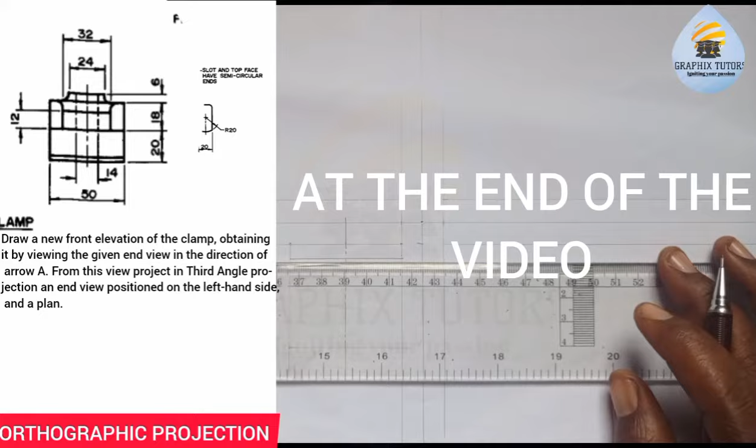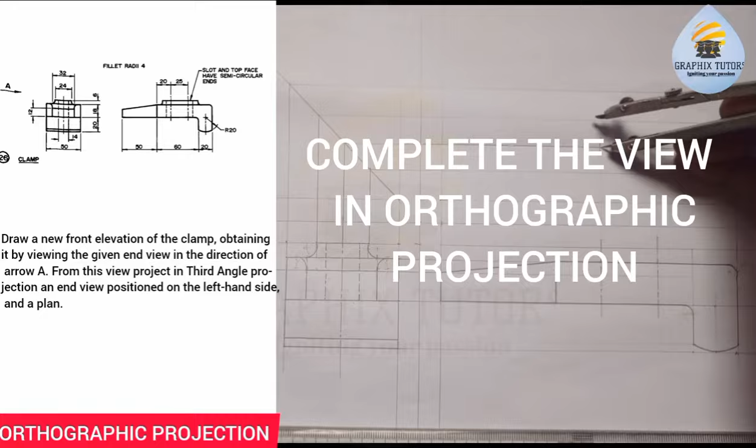If you look at the left hand side of the screen, you will see a figure, and the question that follows this figure says: draw a new front elevation of the clamp, obtaining it by viewing the given end view in the direction of arrow A. From this view, project in third angle projection an end view positioned on the left-hand side and a plan.

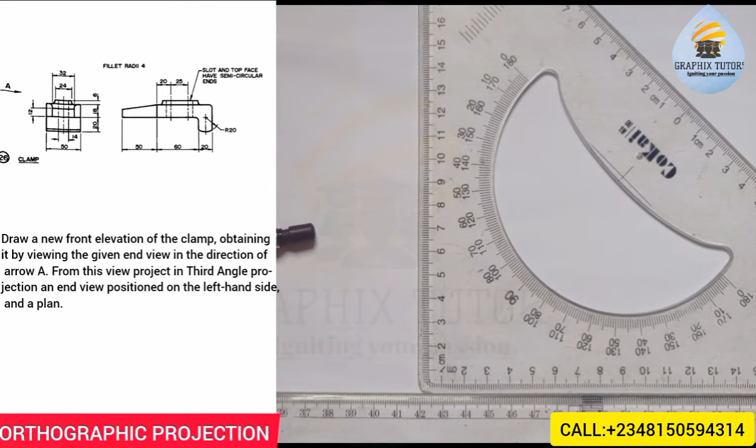Now, what we're about to draw is an orthographic projection, and the diagram you see at the left-hand side of the screen is incomplete, right? So we have to complete it, and we're told to redraw it in third angle projection. Is that okay now? So the first thing you have to do is to draw your vertical line in this fashion, and you draw the horizontal line in this fashion.

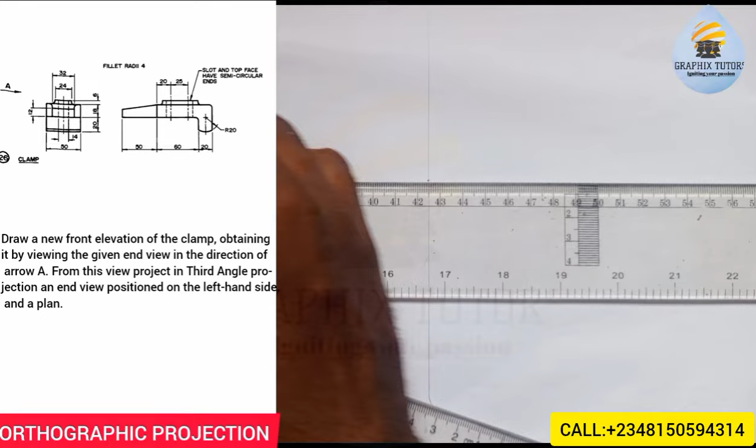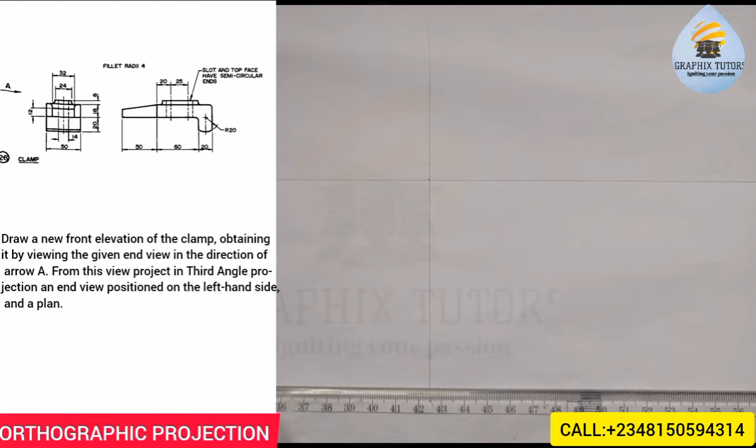Hope you can see that. So when you've done that, you now measure 10 millimeter above the Y and 10 millimeter below the Y. So this is what I mean here. I'm going to measure on my meter rule 0 to 10, right? And I'll place it at the center point here. I'll measure 10 to the right, 10 to the left, then 10 upward and 10 downward.

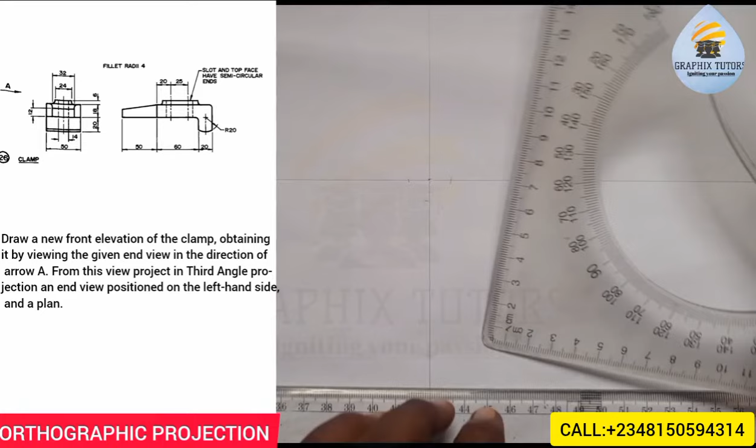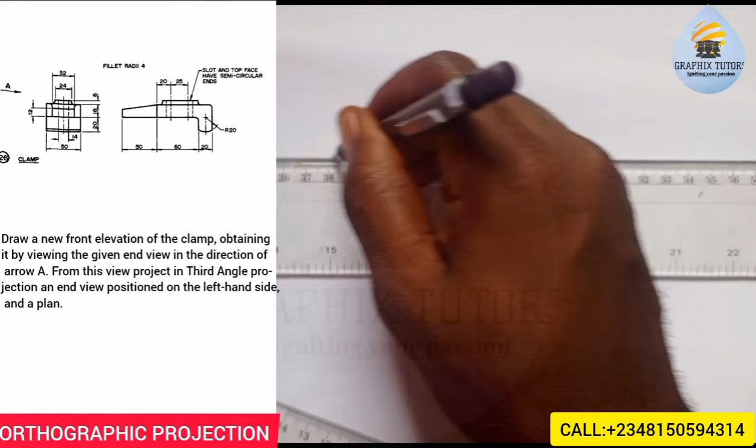So with the help of my instrument, I'm going to draw it this way. Draw the vertical line here, and also draw the horizontal line here. This will move and touch here, continue, then this will move, touch here, continue. So this is what I was expecting that we are drawing out. Is that okay now? So let's move forward, right?

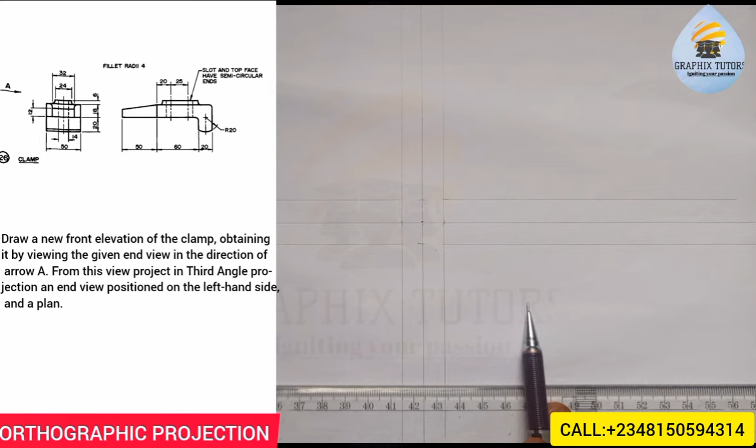Now we'll start. This is my first quadrant, second quadrant, third quadrant, and fourth quadrant. Since we want to draw a third angle projection, the view that we are focusing on, which is the end view where my arrow is pointing, will be drawn at the third quadrant here, right? So I'm going to redraw that diagram here. Then I'll draw the front elevation here, and I'll draw my plan here.

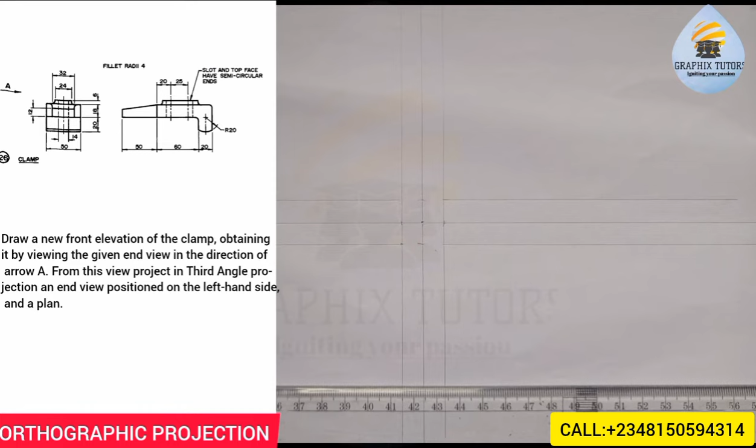So let's start. Your reference point will be from this point here. If you look at this figure closely, the entire length is given to be from here to here, which is 50. So I'm going to measure 50 from here, from 0 to 50. And half of it is 25. I will just draw that point down this way.

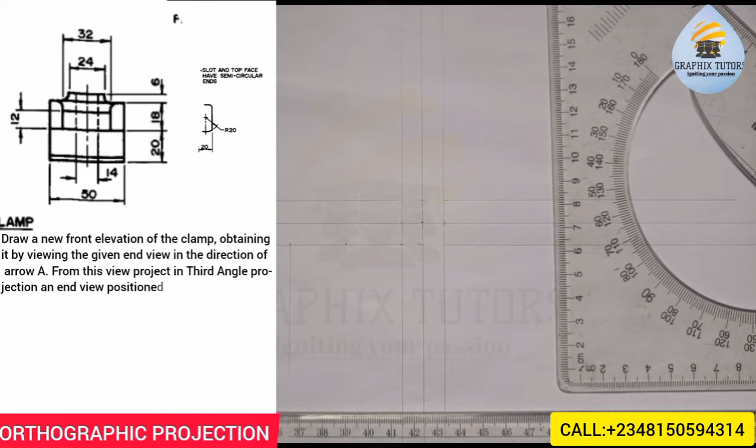Right? Then the entire height here is given as 20 plus 18 plus 6, and that's given as 44. So I'm going to measure 44 as my entire height. So 44 from 0 here, 44 here. And I will close them up this way.

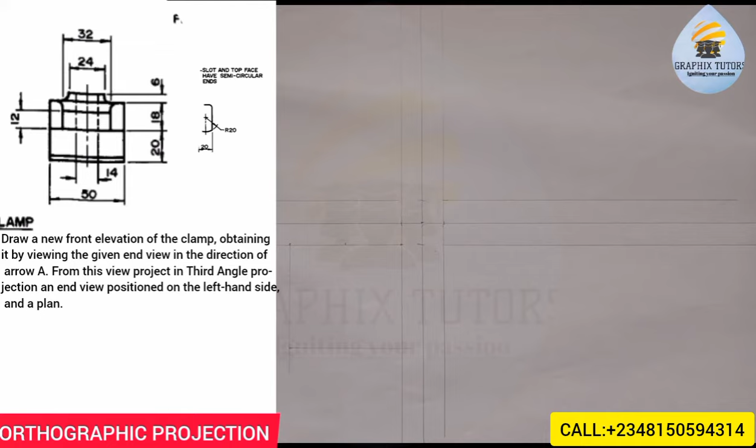And don't forget about the center of the figure. So I'll use my center line to show it this way: long, short, long, short, long, short, long. So that's the center of that figure. Now if you look closely, let's start from this top here. I will call it the slotted top face. And the thickness is given to be what?

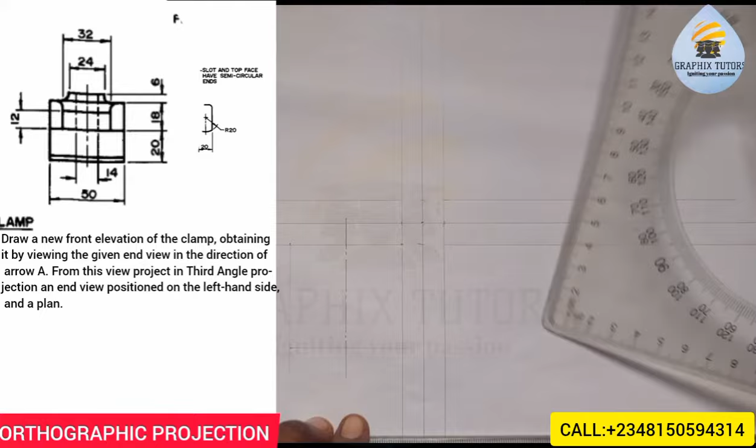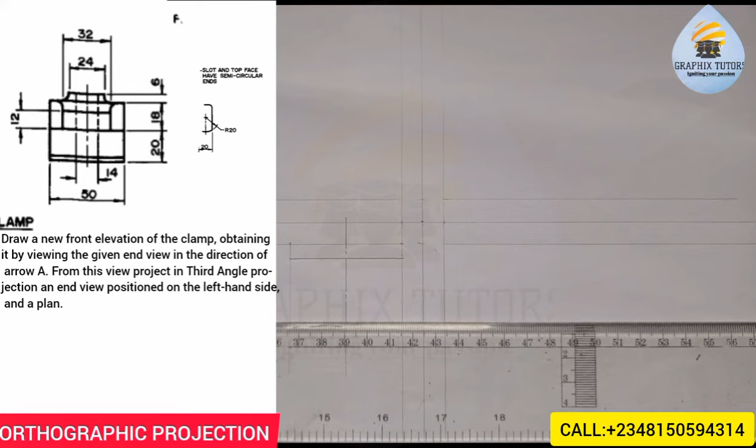24. But before that, you're going to measure 6 for the slotted face, right? Because from here to here is 6. So you measure your 6 from 0 to 6. Can you see that? And I will draw my thick line to close it up this way. And the thickness is 24, as you can see from here to here, which will be at this point here. So I'll measure 12 to the left and 12 to the right.

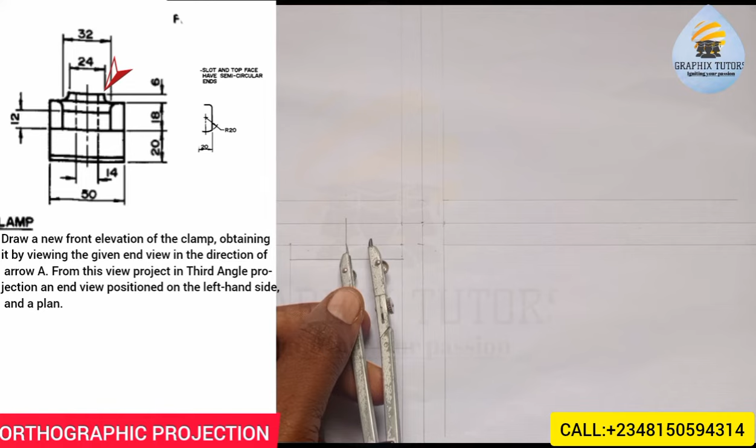So it's always good to make use of your set square. If I take my set square and I measure 0, this is 12 here. Can you see that? And I'll place it at this point here. I'll measure 12 and 12. That'll give us 24, right? Then I'll bring it down using my faint line, here also faint line.

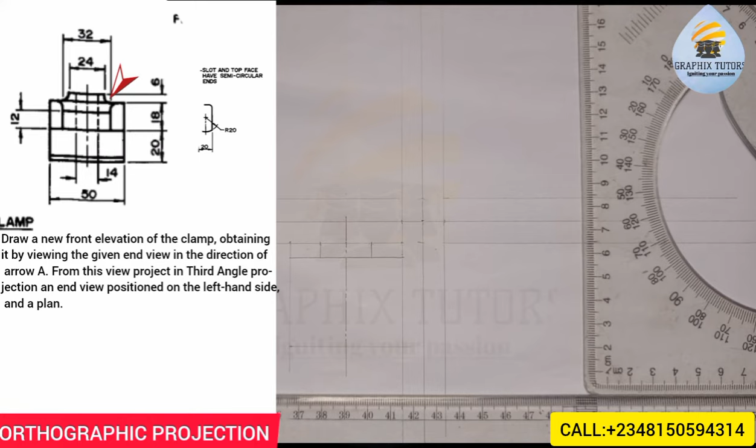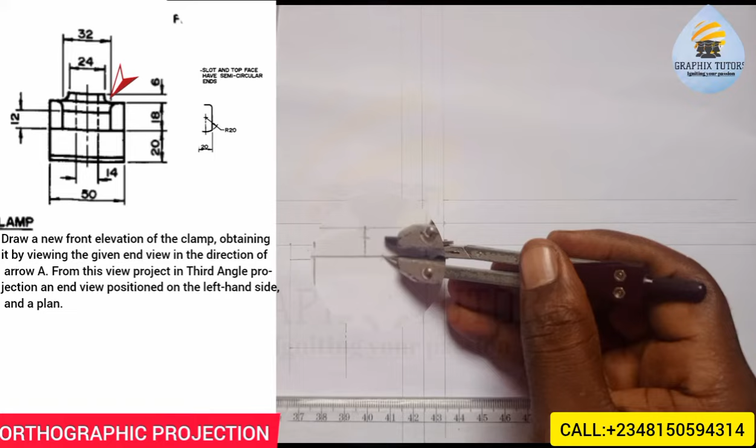Now, if you look here, there's a curve here, we'll call it the fillet. And the question says we should use a radius of 4 for any fillet. So I'm going to take my compass and measure 4 on my meter rule, from 0 to 4. I'll place it at this point, mark 4 here and 4 here. Then where it meets here, I'll strike an arc, and where it meets here also, another arc. At the point where they meet, I'm going to draw my fillet.

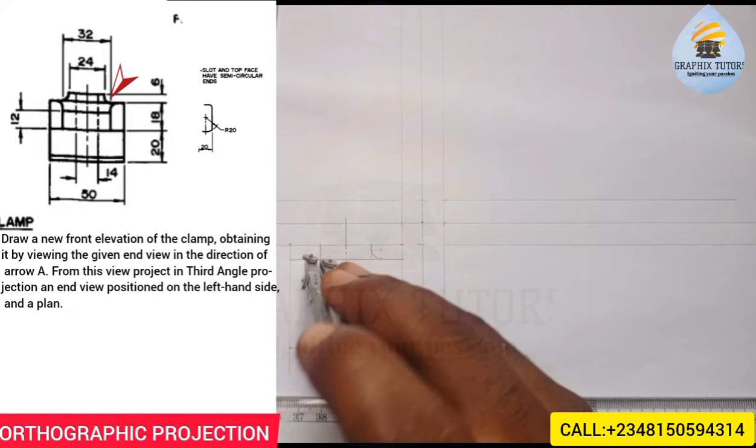Hope you can see that. I'll come here also, I'll do the same thing. 4 here, 4 here. Place it at this point, strike an arc. Place it at this point, also strike another arc. So where they meet, I'll do the same thing. Hope you can see that.

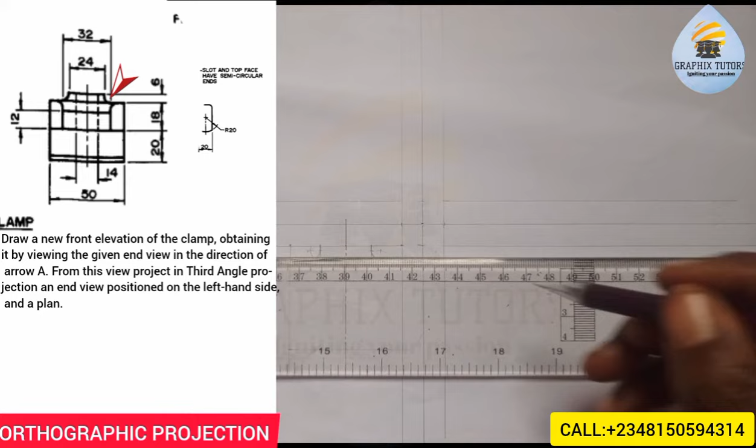Now I can thicken the two ends here this way. From here, I'll thicken it to this point, right? And I can also thicken here, this way. Now the next line you are seeing here is this line, and before I get to that line, we should measure 18 from here first of all.

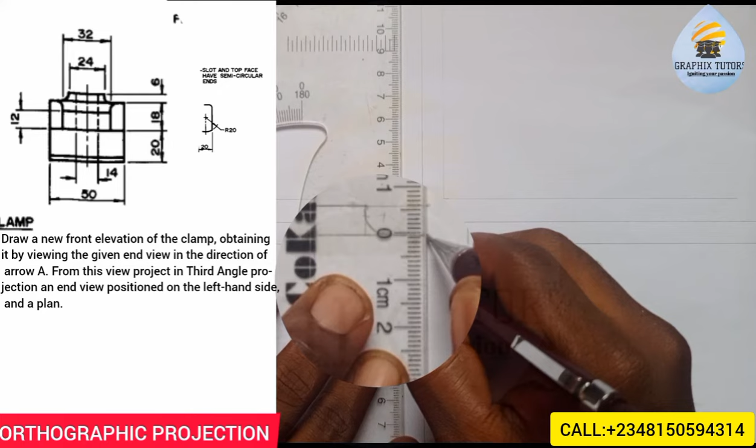So from 0 to 6, then the next one is what? 18. So I'll measure 18 from 0 here. This is 10, this is 18, right? Then I'll draw my thick line there, this way. So from that line now, I'll measure 12 upward.

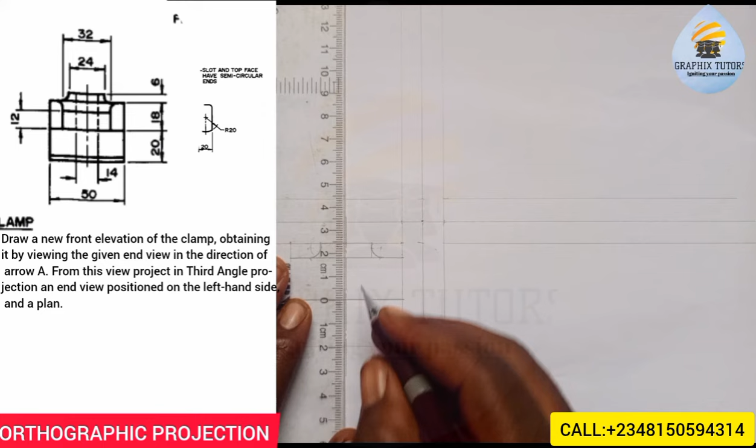As you can see, from here to here is 12. So I'm going to measure 12 upward, from 0 here to 12 here. Then I'll draw a faint line this way first. So once I've done that, the next line we'll see here is given to be what? Thickness from here to here is 32, right?

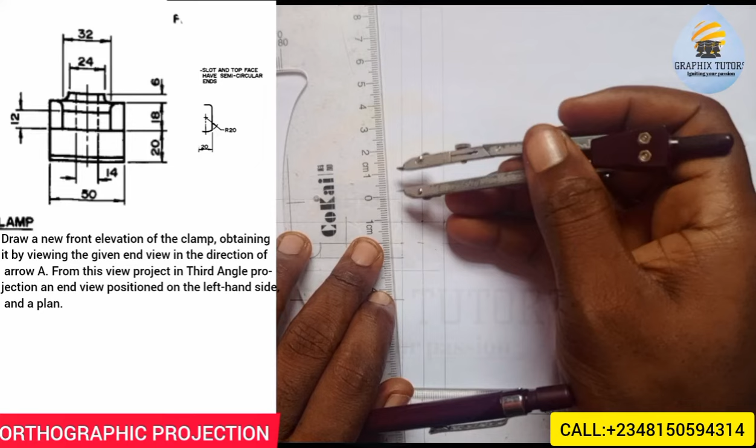So I'm going to measure 16 on my meter rule. From 0, this is 16 here, right? And I'll place it at this midpoint here. I'll measure 16 to the left, 16 to the right. Hope you can see that. And I am going to bring it down from here to touch somewhere around there, faint line.

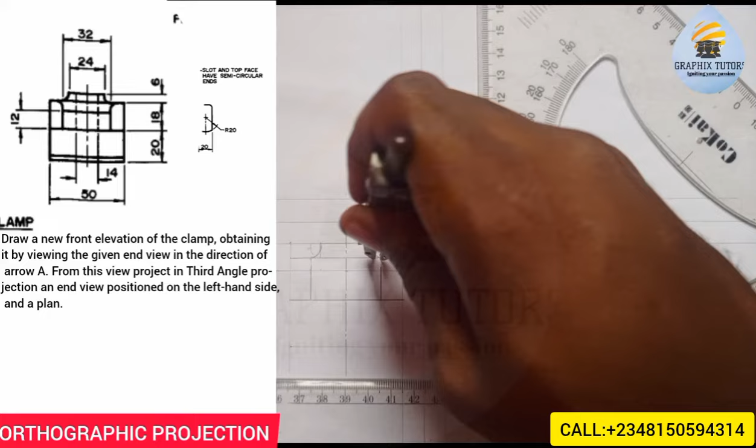Then from here to touch somewhere around there, faint line. So I'll do the same fillet at that point too, same fillet of 4 millimeter. So I'll place it at this point. Strike an arc, 4. Strike another arc, 4. Where it meets here, strike an arc. Where it meets here, strike another arc. So at that point where they meet, you get your fillet.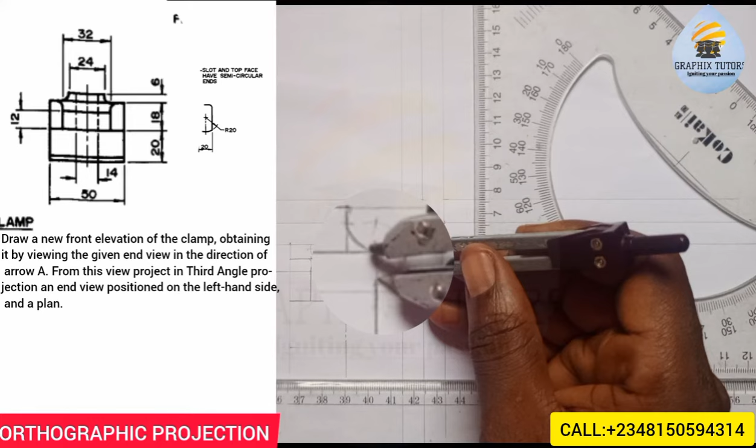So let's do that again. At this point where they meet, strike the arc. So this is where they are meeting here. So you can get the fillet here. Can you see that? I'll come here too and do the same thing where it meets here. Strike an arc. Strike an arc. Come here, cut here. Come here, cut here. So where they meet here, I'll have this. You can see that. That is what we have there.

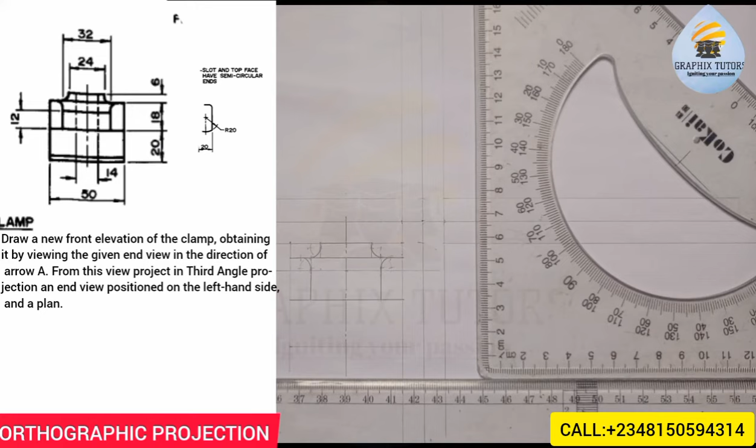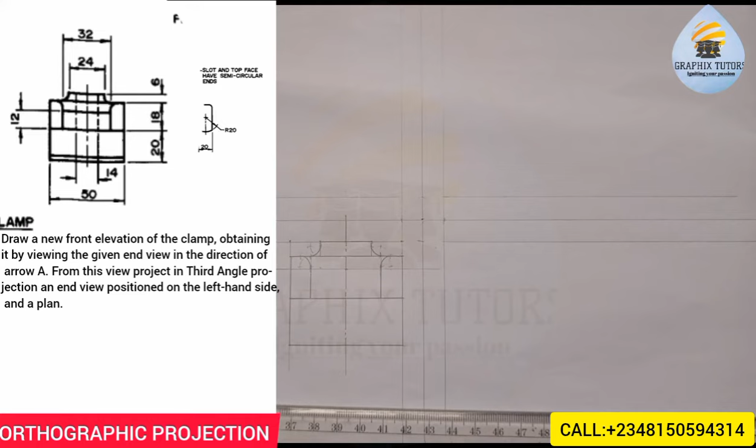So I can now take from this point here straight down, taking from this point here straight down, then close it up. I don't know the thickness between here and here, so when I draw my end elevation, I'll be able to get that here, right? So we have successfully drawn it out.

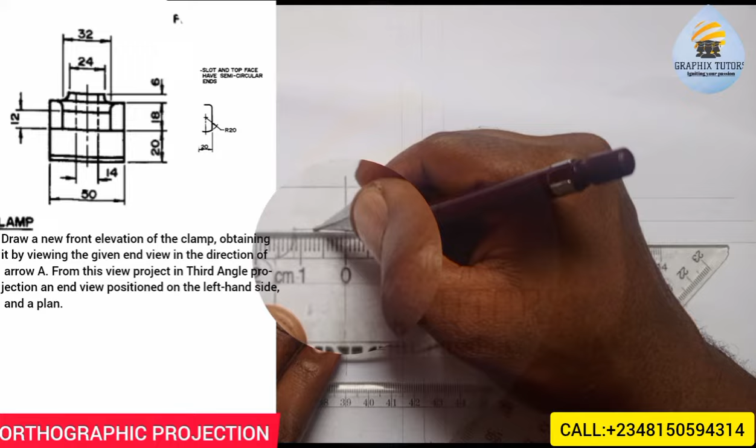There's one again, which is the thickness of this hidden line here. Here to here is 14. So I'm going to measure 14. So I'll just take 7 to both sides, 7 and 7. Right? And you just take it down straight. This is my hidden line. You can see that. So let's move to the end elevation now and see what is going to be happening.

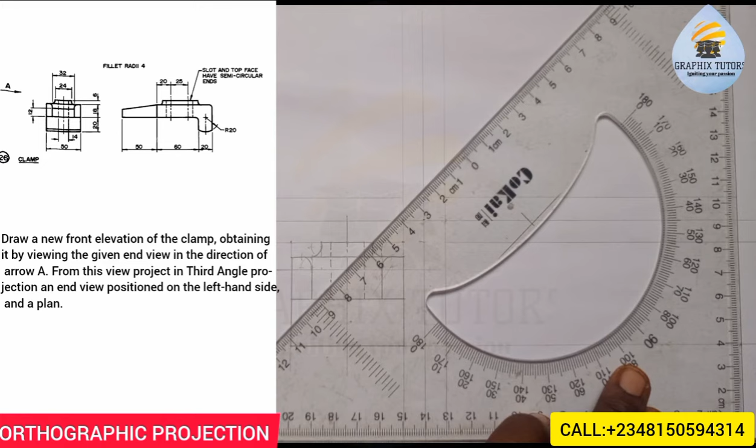So from here, I'll project this to the side, and from here, I will measure the distance from here to here, which is 50 plus 60 plus 20, and that is 130. So from 0 to 13 is 130. Right? Then I'll take it up. Then at this end here, from here to here is 20. So I'll measure 20. From 0 to 2 is 20. Then half of it is 10. So I'll just take it up. Then here also I'll take it up a little bit more.

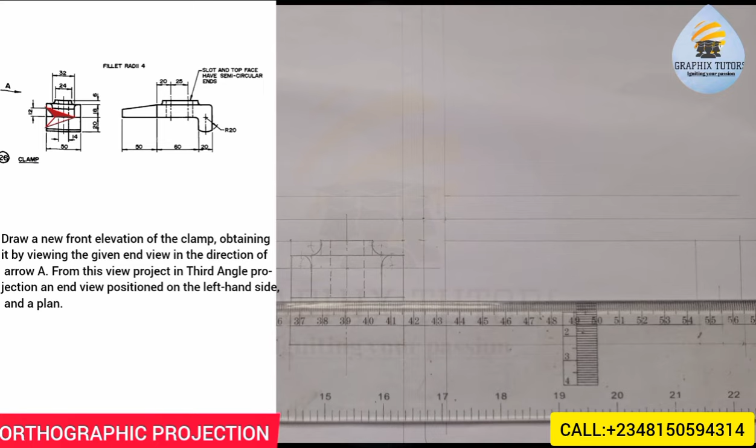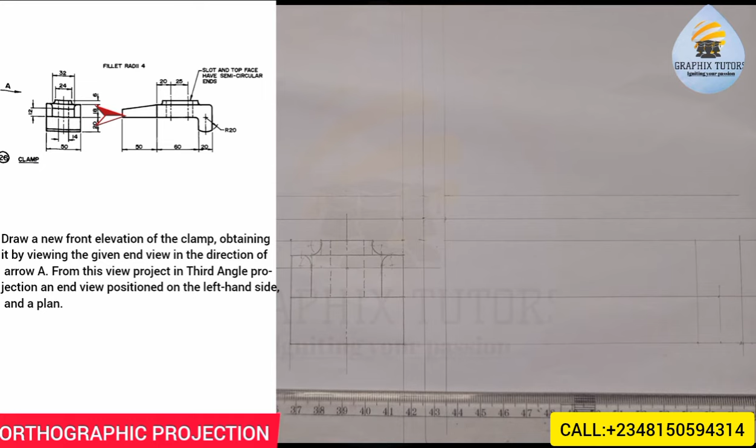Now from this point here, this base line you see here is the same line as this. So I'll just draw it this way. Can you see? So this is meeting at this point here. So I'll take my compass and measure 20. We know that from this end to this end here is 20. So I'll place it at this point here, then draw a semicircle here, and take it to this point here. Can you see that? So this end here is what is giving me this thickness here. Hope you can see that.

And we also have another fillet here too, 4 millimeter. From here to here is 4. So I'll just measure 4. You can measure it on your meter rule, 4 millimeter from 0 to 4. Now place it at this junction here. I'll strike an arc here and here. I'll come here also and strike another arc here. And I'll come here, strike another arc here. So where they meet, I'll get this. Hope you can see that.

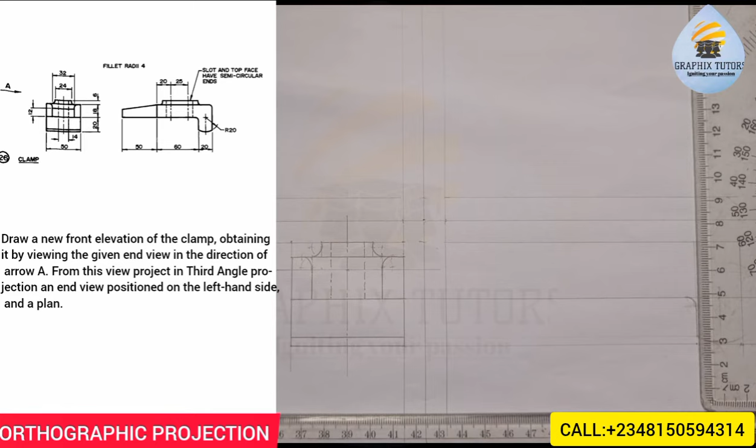So let me thicken it out. I can thicken from here to this point, right? And I can take this. This will be stopping at this end here. Also, we have a fillet here, so what you did here, you do it here. Let me just use my hand, but you need to measure it 4 millimeter.

So let's take this to that point. Or you just measure from this point where they meet here, strike an arc here, strike an arc here, you place it here, you cut here, you place it here, you cut here. So from this point where they meet, you'll be able to get this.

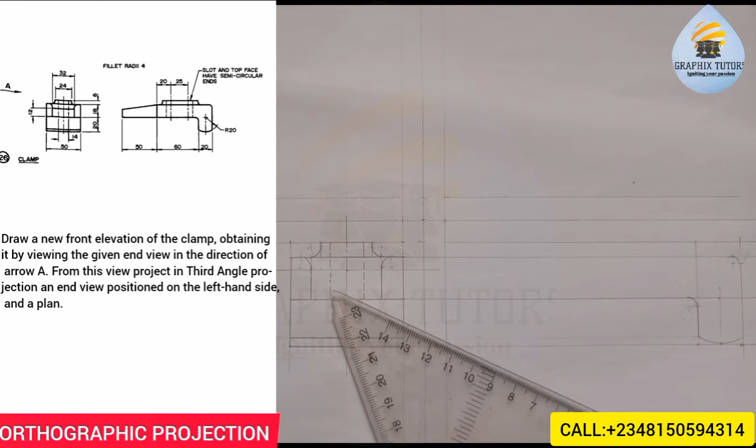So let me bring it out. So I'll just bring this out here this way. Right? So I'll just do the needful from here too. As you can see that line, from here it is from this point straight down to this point. Right? And I can also thicken it out too. You can see that. Now the thickness from here to here, as you can see in the diagram, from that point to that point.

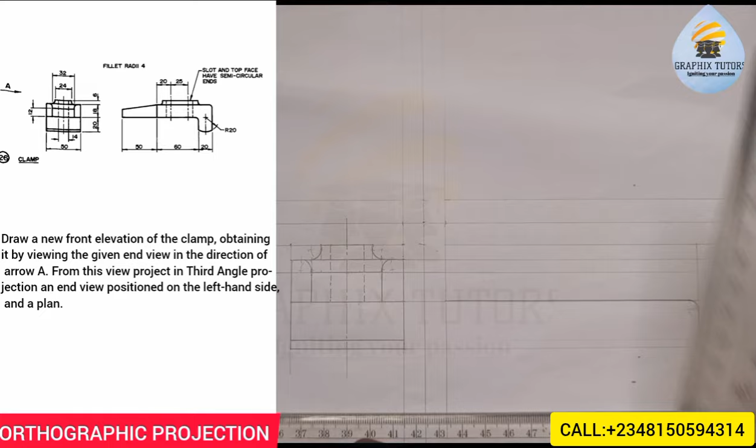Let me just close it up. Do the same thing as this line here. So I'm going to thicken here from this point to this point. And the next thing we have is you measure 50 from here to here. So 50 will be from this point straight down to this point here. This is 50. And that is where I will draw this line this way. Right? The line will come and meet this point here.

Then now come here, because it's the same length here, as you can see from the diagram. Then I'll just join this to this. You can see that? Then I'll take this from here to come and touch here. Hope you can see that. Now the next thing is from this point to the next point, that's the center line. You can see this line is the center line, these two lines here, this and this are center lines.

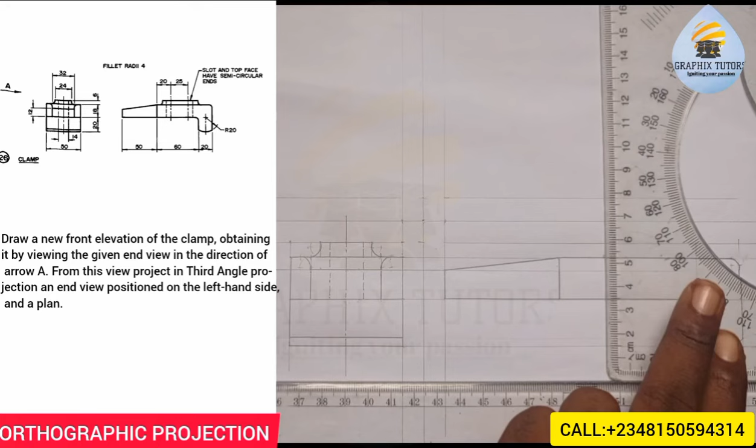So from this point here to this point, I'll measure 20, which is this point somewhere around here. So from this point, I'll get the first center line, 20. Then the next one is 25, from 0 to 25. So at those 2 points, I will draw my center line, right? So I'll just have this way, long, short, long, short, long. Here also, long, short, long, short, long. So that's the center line here.

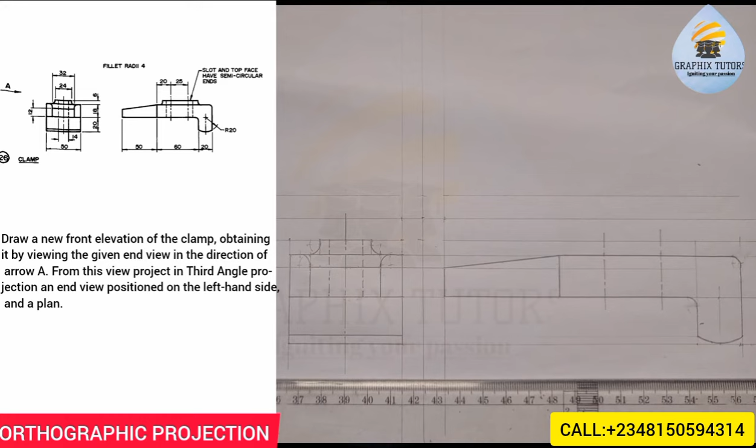So we're not actually done. We don't know how to get this hidden line with just this. So we'll try to get it from the plan. So what you do is, we've drawn this, but we're not done with this yet. I'm going to place my set square on my T-square, 45 degree. Then this is 45 degree. Look at it very well. Or just bisect these two lines to get 45. So from here, I'll just draw a line this way. That is my angle of what? 45 degree.

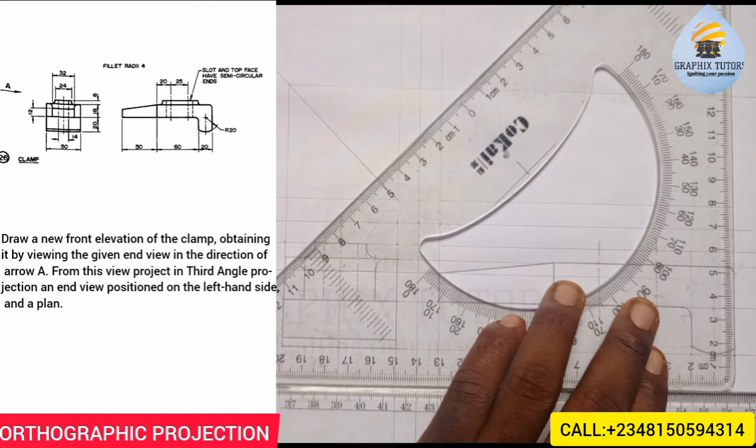So I want to get the thickness of the plan. The thickness of the plan is from here to here. What will I do? I'll project the ends of it. So where it touches the inclined line, I will now project that point from there. You can see that? So this is from this end here. I'll project this up. Right? I'll project this up. So they're meeting here. So this is the thickness of the plan from here to here.

Now the slotted face, the slotted top face here, which is what you're seeing here, and this is what we have here. That is what I want to project out. So if I come here, I project it to touch here. If I come here, I project it to touch here. That gives me my slotted face. So I'll now project those two ends here, and I'll project these two ends here.

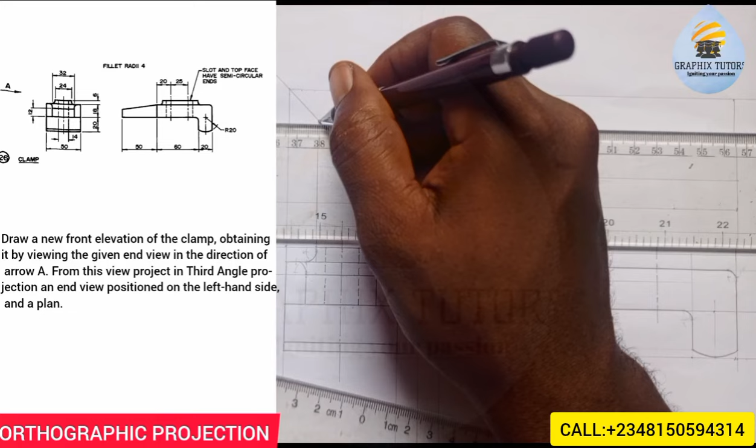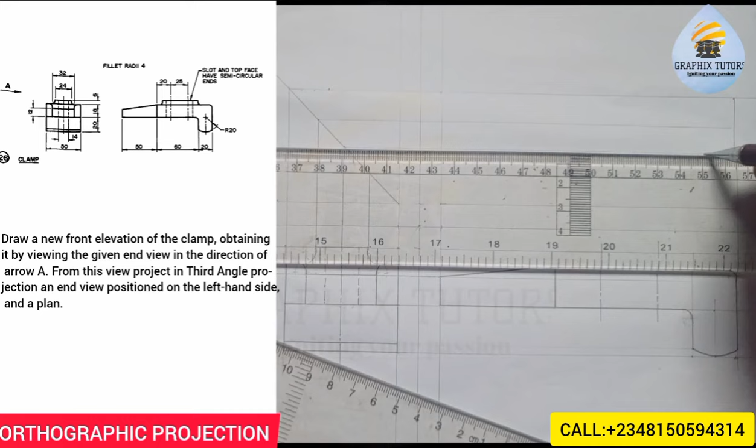You can see that. So to get the center, I need the center line. So this center line too, I'll project it to the front to touch here. Then from here, I'm going to get these two. That's the center line here. So where the two center lines meet gives you another center. So let me just do this. You see what I'm talking about? Do the center line here. Long, short, long, short, long, short, long, short, long.

Right? So when I project this center line here, it's touching here. When I project the center line also here, touching here. Hope you can see that. So he said slot and top face. So what I'll just do is to say the ends are what? You can see the inscription here. The end of the top of it has a semicircular end.

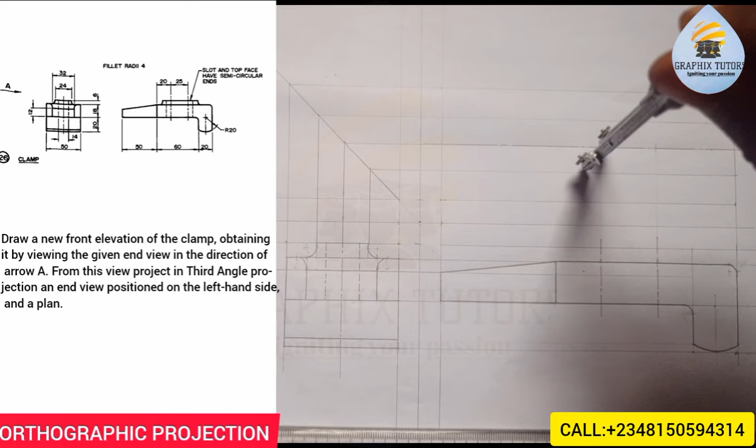So if I come here, this is what we have here. So I can just, from here, I'm having this. Then I'll come here also. And I'll be having this.

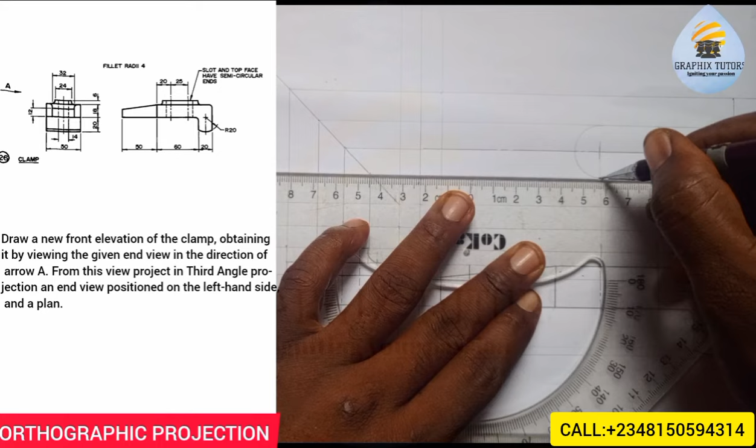See, it has semicircular ends. Then I'm going to take it from here to here, and also from here to here. Can you see that? And we are not done yet. Then this point here is this point you have here, right? And this is the thickness of it, 32.

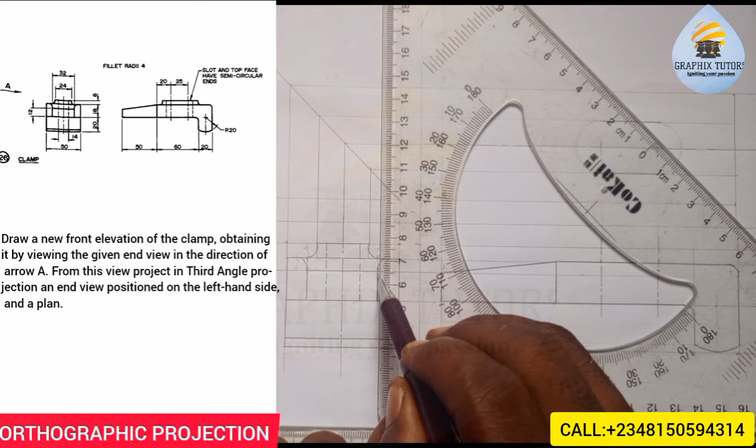I'll just project it upward to make things easier. You just measure 32 from the center. So from here, I'll project it to touch here, and from here, I'll project it to touch here. So where it touches, I am going to project it to touch here, the beginning. Project it again, it will touch here at the beginning. So that is where it is.

I can just extend it more. So let's extend it more and extend it more. So I'll take in those 2 points there, there to the other point here. Hope you can see that. So from this end and this end is what we have here. So the next thing is

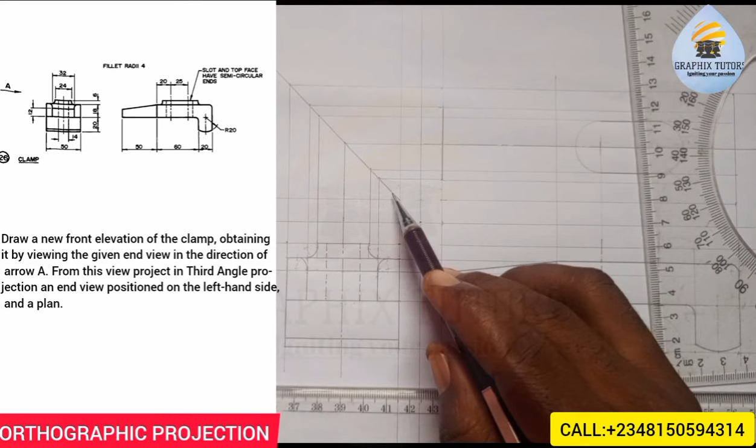I'll project here upward, faint line, and where that line meets, where this meets to this, right? And this line here, where it meets this and where this line meets this, will give us what we actually want. All together. So it meets here, this line, right? It meets this here, and also meets this here. That is where I'm going to draw my

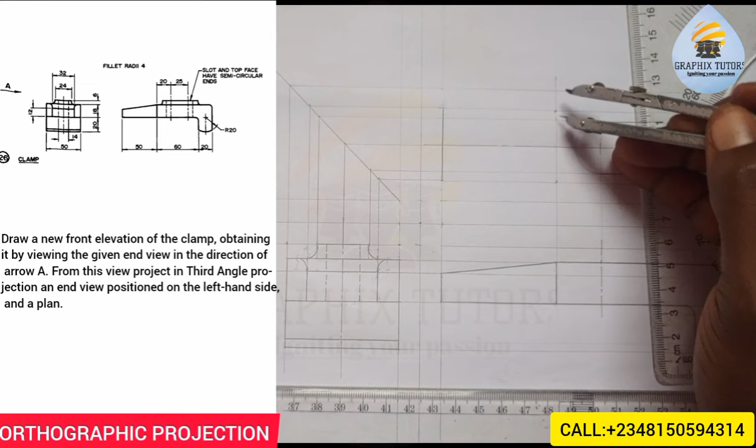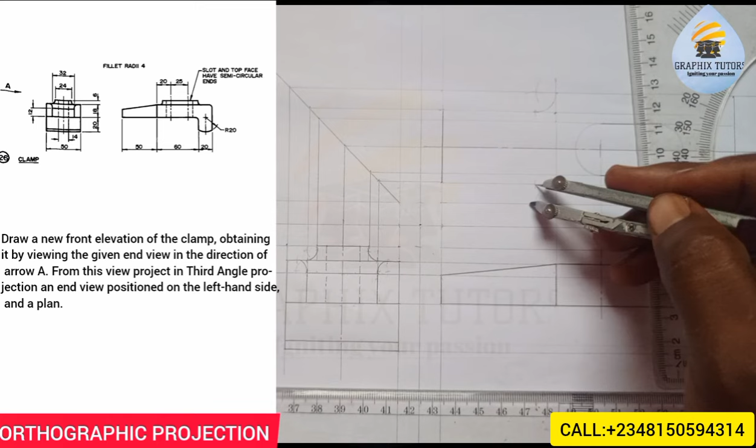fillet, sorry. So when I place it at this point, I'll mark here, I'll come here, I'll strike an arc, I'll come here, I'll strike another arc. So where they meet will give me this. I'll come here also, strike an arc here, strike another arc here, place it here, semi arc here, place it here, arc here. So where they meet, I'll get the next one. Hope you can see that.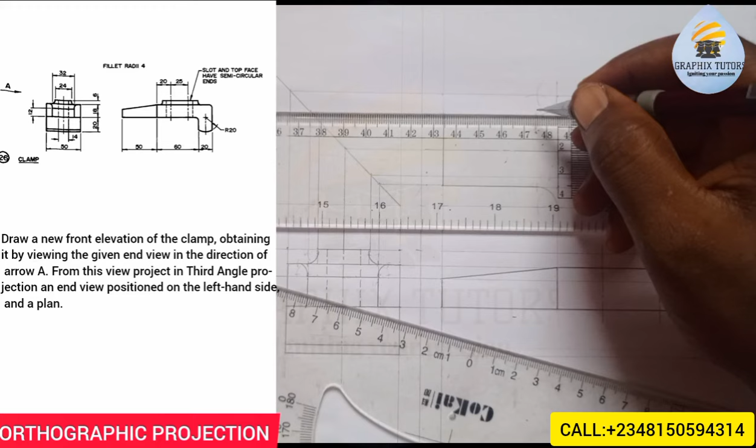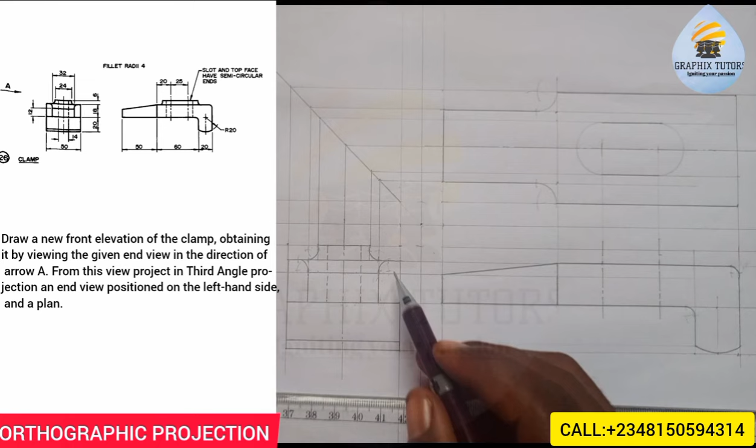So this is what we have here. So I'll just stick in from this point to touch here, and from this point to touch here, right? Then from this end point here to touch here, and from this end here to touch here. So I project it. Why am I doing that? Because this is what we have here. Is that okay now? So I'm having that. And what else do we have?

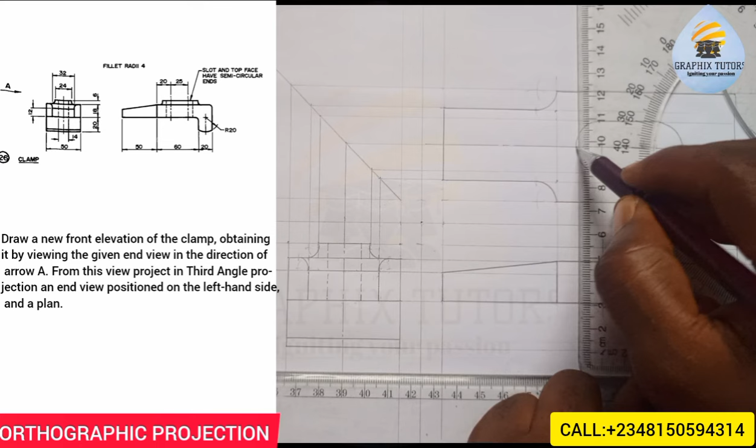Now the next thing is this thickness here, this hidden line you're seeing here. To get the hidden line, you trace this point here. Right? That is our hidden line. So bring this down first of all to get the hidden line. So this is the hidden line here. Then here also trace it down to give you the hidden line here.

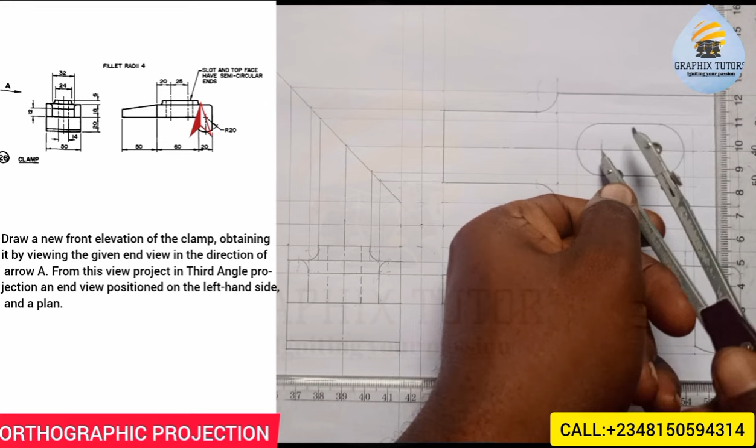You can see that. Now the next thing is to get the end here, this end here to here, you just project this point up here. So where it meets here, take a compass from this center to this point. Can you see it? Then come to this point here to get the next point here. So that point here is where the line is going to end. So here I already have this, and here also I already have this.

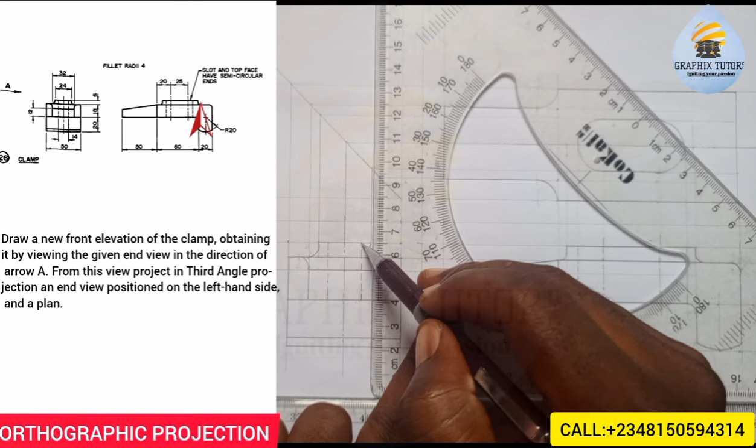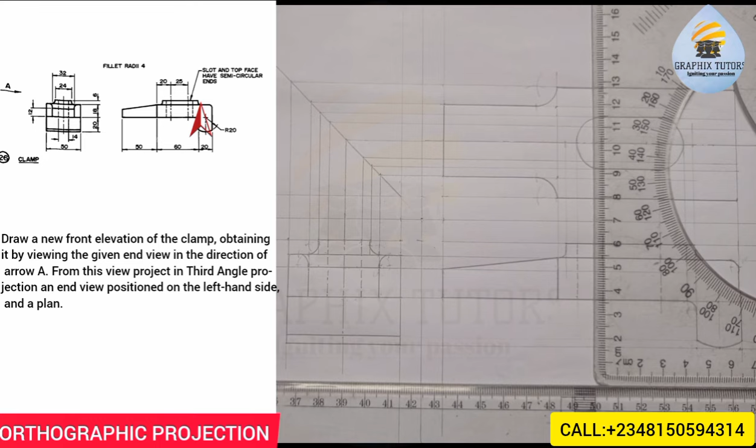So you project it upward to touch here, project it upward to touch here. So from here where it meets this line, draw your line. Where it meets here also draw your line. So where that line is, that is where I'm going to get what I want, right? This line you see here, you can't see it on the top, so it will be a hidden line. So I'll just draw the hidden line at this point here. This is how we have that, right?

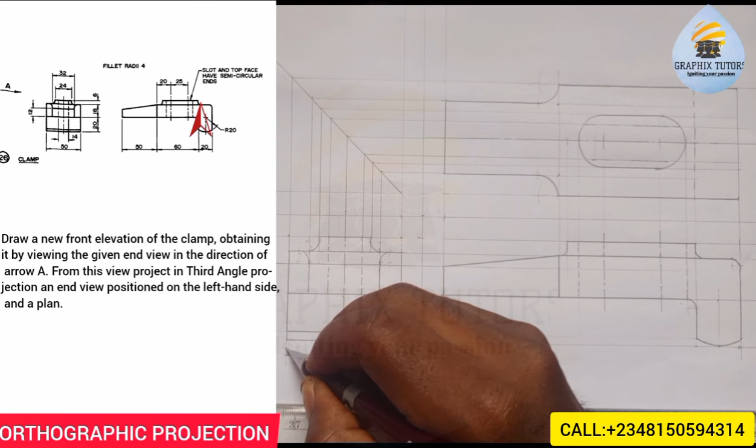So it's very important for you to put your dimension when you are done. The way you see it, from here to here is 50. Do whatever you've seen there, right? Doing your dimension is very important. So this is what we have here. You put your dimension in. Very, very important. We know from here to here is given to be 50. So you do it all through your diagram.